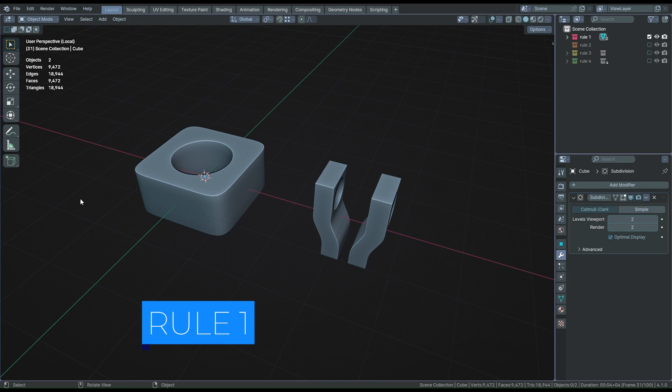The first rule of this workflow is not to let the subdivision modifier determine the shape or curvature of your mesh. This is an issue because when it comes to texturing and texture baking, especially if you are baking normal maps, the high detail mesh that you would be baking from would actually have a different shape to the low detail mesh, causing issues to the mapping and shading of textures.

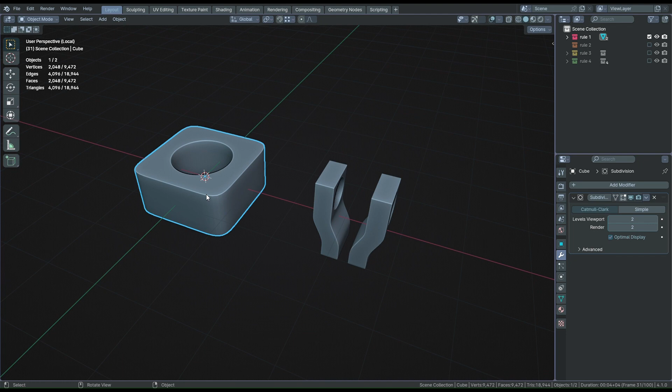The whole point of using supporting loops and creases is to control the subdivision modifier, but if we are letting the subdivision have control over our mesh, the point is lost and we are back to square one. Over here I have two shapes. Each one is wrongfully depending on the subdivision modifier to curve its sharp edges.

This first mesh is dependent on the subdivision modifier to curve its corners. As you can see, the base mesh corners are sharp, but the subdivided result is smooth. We discussed in the last video why we can't just apply a crease to these specific edges. Now let's discuss how to solve it. The answer is quite simple. If you want this edge to be smooth, smooth it manually instead of depending on the subdivision modifier.

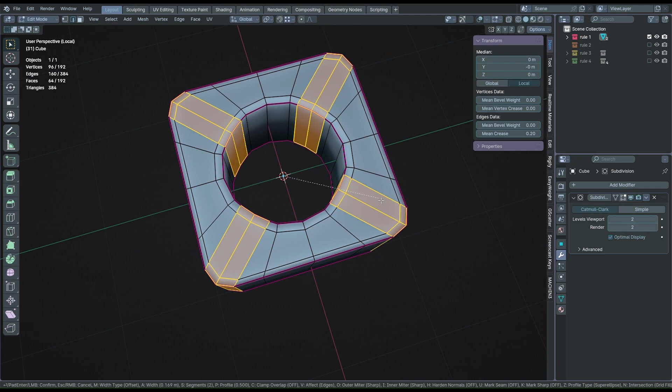So let's take each of these edge loops and bevel them using two segments and a shape of 0.5. If this model had more detail, using a stronger bevel with 4, 6, 8 or any even number of edges would be more appropriate. Now, the modifier doesn't change the shape of our original mesh, it only smoothens it.

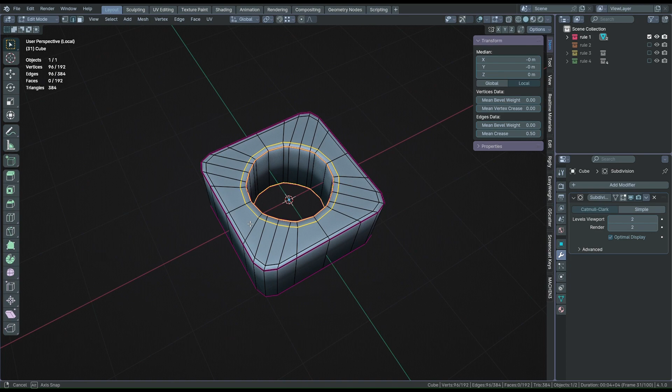However, we will have to recalculate the circular hole, as the extra edges made them uneven. Select every circular loop and run the circle tool on all of them at once. This model is fixed, let's move on to the second one. In the next section, we will learn about localizing topology, which is a method that will be very useful when working on these kinds of problems in the context of a more complex mesh.

This model has a similar issue. These original edges are sharp, but the subdivision modifier curves them. In this case, if we wanted to keep the edges sharp, it would be as simple as creasing them, but let's assume we want them to be curved. In the same way as the previous model, all we need to do is bevel the edges manually, providing a lower poly curved mesh that our subdivision smooths over, instead of completely changing its shape.

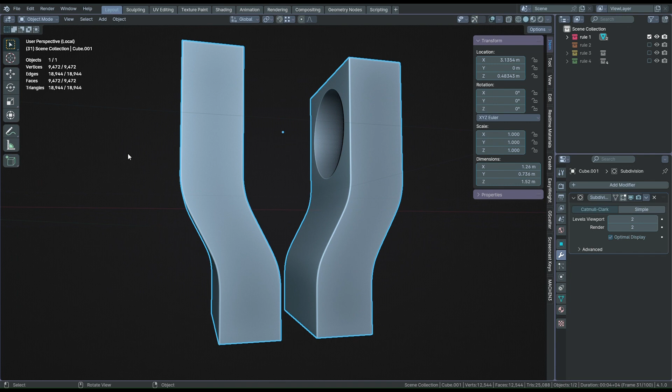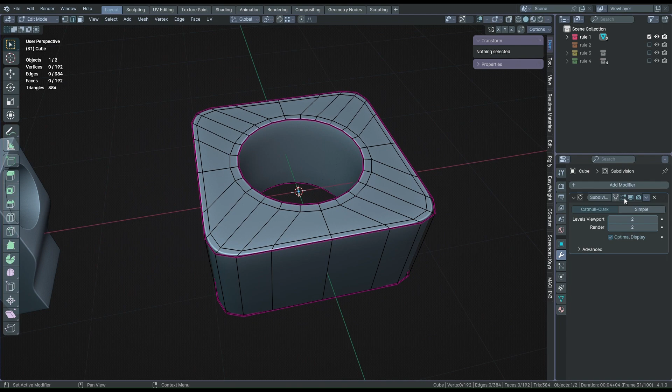Notice how for both examples, after adding beveled edges, the difference between the subdivided and unsubdivided models is less pronounced, meaning we have done a good job at controlling the subdivision's effect on our mesh. A good habit is to disable the edit mode view on the subdivision modifier. This forces you to make good base meshes regardless of the subdivided result, and helps you avoid depending on the modifier to determine the shape and curvature of our base mesh.

So to summarize, the core of Rule 1 is to be in control of the subdivision by manually adding curvature, and using the subdivision to smooth it, but not define its shape. The second rule is to make sure your creased edges have good edge flow, meaning they are neighbored by two identical edges, and that their flow is not disrupted by poles. Without this, your objects won't smooth well.

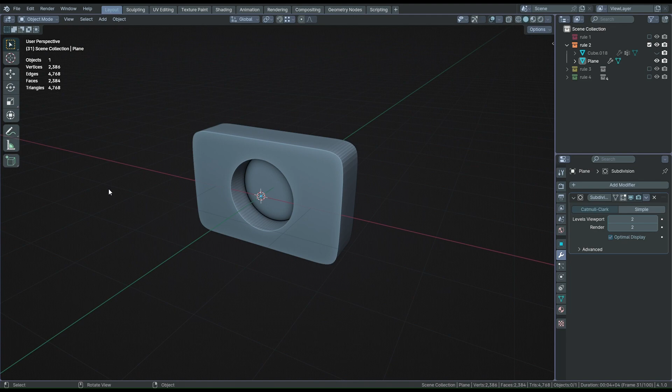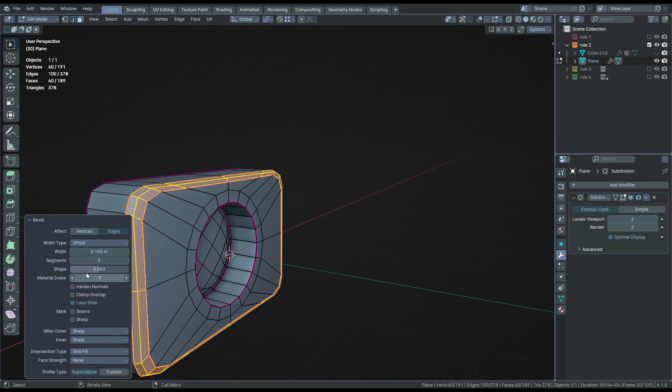Take a look at this object. The circular hole is great, our creased edges have good neighbors, and all the poles that would have disrupted this loop have been pushed inwards using another loop cut. However, looking at the outer loops, this one does not have good neighbors, nor does this one, which I can't select using Alt-click, a red flag, signaling that we have poles at each corner. This is a simple fix. This edge needs a bevel, removing the unnecessary loop and reassigning creases, and now it has good neighbors.

For the back loop, you could bevel it the same way and remove the unnecessary loop, or you could inset these faces, creating the good neighbor without also creating an unnecessary loop, making our workflow slightly faster. The poles have also been moved from the corner vertices into the neighboring loop, in the same way as it did with this circular area.

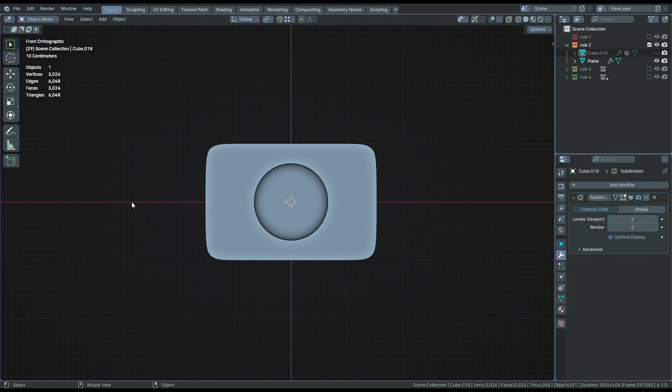In this example, having good edge flow may seem simple, but do not be fooled, this gets much harder to deal with as the shapes get more intricate. Take a look at this shape. Notice how I'm utilizing the first rule, creating curvature manually and letting the subdivision smooth it, and how I'm utilizing the second rule, giving each creased edge good neighbors.

We know that only the original creased edges need good neighbors, but in the next section we will look a bit further into scenarios in which it is important to direct the edge flow of other areas in a model. In studio settings, having good edge flow is essential, not only to ensure good shading, but when multiple people are working on a mesh, having the creased loops be easily selectable is a must.

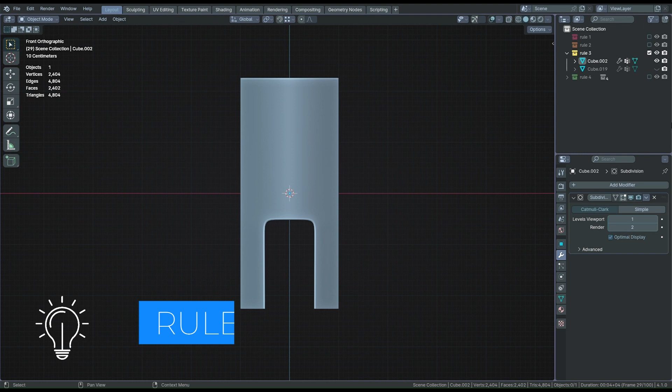Lastly, this applies to all the topics discussed in this section, but for this rule specifically, the only way to get fluent at it is through practice. There is only so much you can learn by listening to me explain it. The third rule is not to be afraid to apply a level or two of subdivision if you don't have enough general geometry in your mesh, saving backups in the process.

I know from personal experience, and from others, that it is easy to get frustrated whilst working on subdivision meshes, as you might be lacking geometry to add necessary details, but don't want to add more geometry because it disrupts the shape and smoothness of your mesh when subdivided. In these scenarios, it is always a good idea to have a deactivated collection where you can store a duplicated backup of your mesh before applying modifiers.

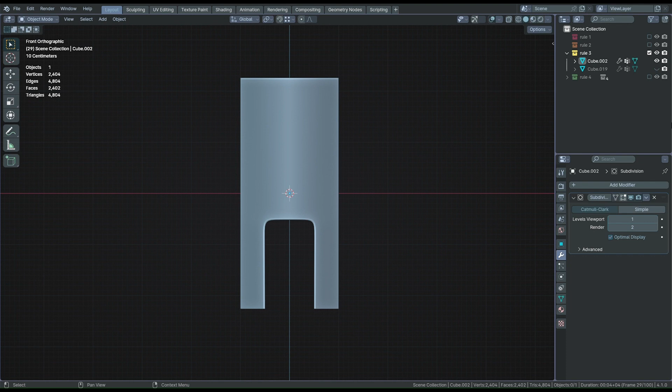For example, I have this object, which has a decent amount of faces, but I want to cut a really intricate shape into it, which this object does not have enough geometry to support. Looking at it in wireframe view, with the optimal display option disabled, I can see a preview of how dense this object will be when subdivided.

If I am happy with the level of detail I am previewing, what I can do is duplicate this object, press M and move it to a new collection, which I can call backups. Then I can disable this collection and put it in the appropriate collection, in this case within the Rule 3 collection. After this, I am able to take this mesh, apply the subdivision, and create the intricately shaped cut through it. If I ever want to revert back to the unsubdivided mesh, I have that option in the backup collection.

The implication of the third rule is not to be afraid of adopting a destructive subdivision workflow at times when you are lacking the required geometry for your mesh, and that applying a subdivision layer is almost always more efficient and effective than flooding your mesh with more loop cuts in an attempt to make it more dense. If you are unsure on a larger scale about a change you are about to make to an entire project, don't hesitate to save a backup.

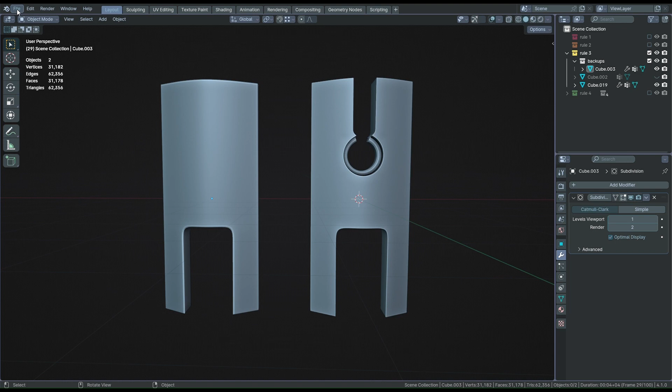The fourth rule is to always keep in mind the limits of the Crease Plus subdivision workflow. While it is the best way to achieve clean, smooth models, it can be laborious and time-consuming. To confront this, subdivision modelers are required to be able to optimize their workflow, think ahead, and be smart about how they spend their time. The best ways to optimize your workflow are to use non-destructive tools and modifiers, like mirrors, arrays, and instances. Let's go through how each of these can be used.

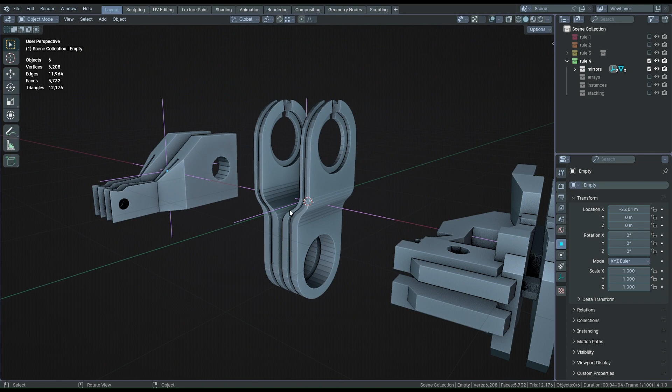1. Mirrors, a quick way to generate a lot of detail. You can create, for instance, a small robotic part, and set an empty plane as the mirrored axis, generating double as much detail in half the time. This gets exponentially more intricate once you introduce three-dimensional depth into your objects, and even more so when you add holes on the mirrored axis, giving the illusion of extreme detail.

2. Arrays, another great way to build more complex objects out of one base mesh, generating linear, radial, or even curve-based detail on grids, cylindrical patterns, and curves. To really sell the idea that arrayed meshes are actually larger intricate objects, it is important to implement patterns that flow between instances when arrayed. The more intricate the patterns, the harder it is to spot that this is an array of instanced objects, rather than one detailed object.

Making linear arrays is straightforward, cylindrical arrays are slightly more complex. Create an empty plane and a cylinder. Make sure the array modifier is set to object and select the plane. It is essential that they have the same origin. A little bit of maths is needed to understand this, but otherwise it is simple.

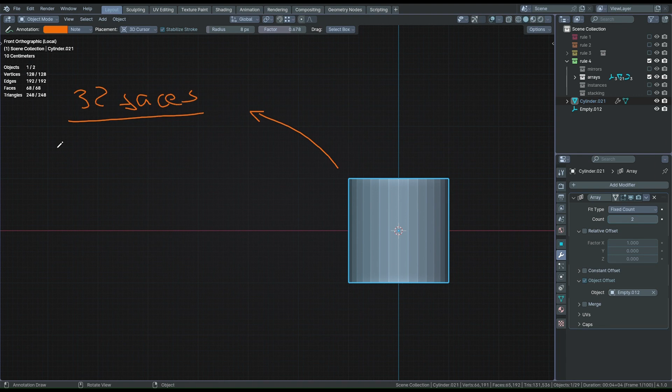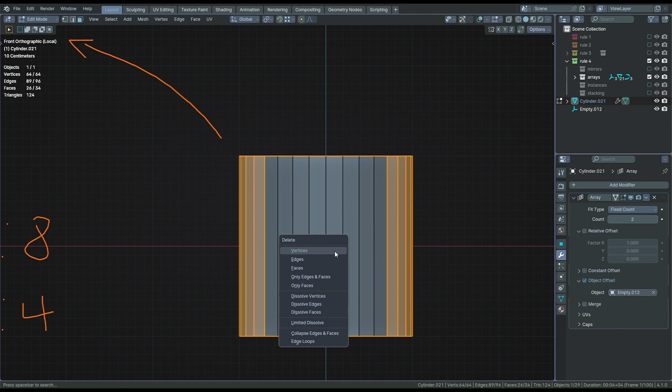I'll go with 4 and 8, and we'll make a pattern with 8 faces, so P equals 8, then array it 4 times, so A equals 4. I'll select 8 faces and delete the rest, and change the array count to 4. Nothing has happened, because we need to rotate the empty to see the array.

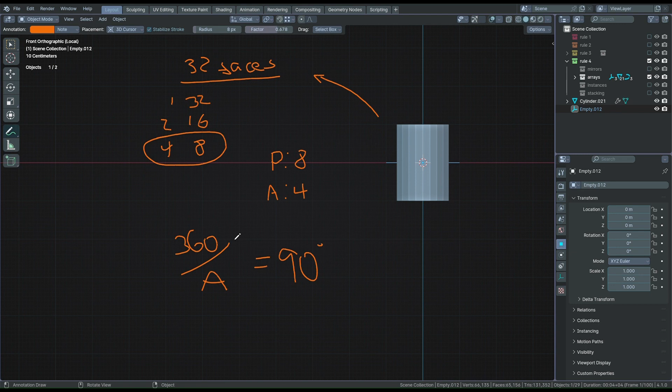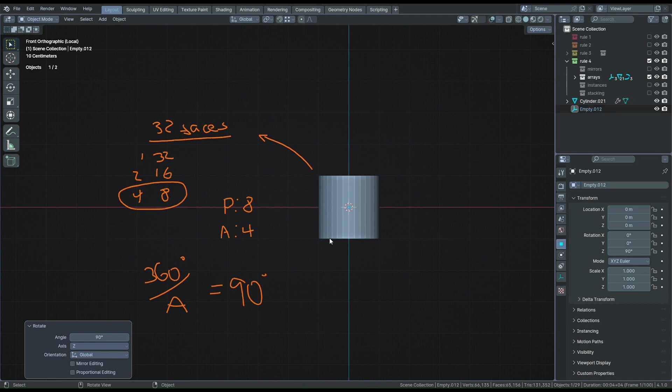To know how much to rotate the array, take the value of A, 4 in this case, and divide 360 degrees by it. In this case that is 90 degrees, and as you can see, if I rotate the empty by 90 on the Z-axis, our cylindrical array is perfect. Finally, enable the merge option, and the first and last copies option, so that our arrayed objects merge together.

I can now edit 1/4 of the mesh, and the pattern is repeated on the other 3/4. Practice this if you still aren't confident in using the formula. We will be learning about curves and arraying along curves in a future section. 3. Instances. Using instances has many benefits.

It allows you to model repeating patterns very fast, can help you model parts that are placed with awkward rotations, and using them is less intensive on your machine than using duplicates. You can even stack these optimization techniques. For example, an object can be mirrored and then arrayed, or arrayed twice, or even mirrored and arrayed multiple times.

And paired with even more modifiers like the solidify or simple deform, which you could also stack, the potential effects are insane. This not only hugely speeds up your workflow, but also introduces patterns and repeating shapes in your hard surface designs. The fifth and final rule is to plan your topology well.

As mentioned near the end of the last section, as we progress through the series, and our knowledge of techniques and tools grows, the need for preparation when working on models will become more apparent. Having a digital or traditional paper where you can sketch out ideas in real time is hugely beneficial, especially with hard surface modeling, where you are imagining complex mechanical systems.

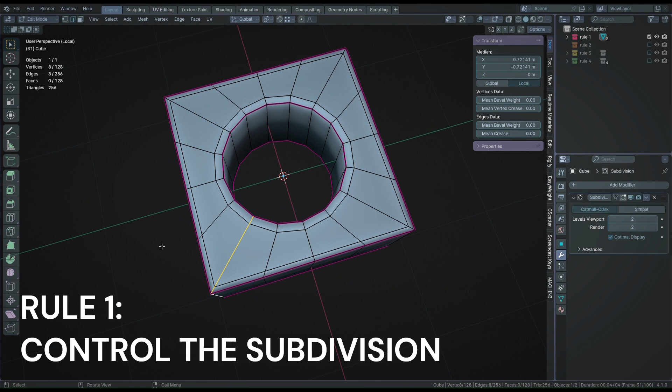Of course, it is important to have reference boards or even 2D model sketches, but a paper you can use to improvise ideas in real time can inspire creativity and help clear frustrations. Let's end this section with an overview of the 5 rules. 1. You must control the curvature and shape of your mesh manually, allowing the subdivision modifier to only smooth, not dictate shape. 2. Good edge flow is essential in hard surface models.

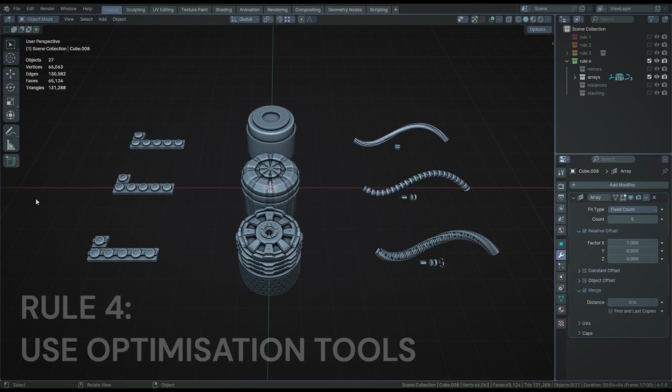Learn to recognize scenarios in which edge loops need good neighbors and poles need to be moved to safe areas. 3. Adopting a semi-destructive workflow by applying levels of subdivision is in many cases the most efficient and precise way to model hard surface detail. 4. Using optimization tools and techniques is a staple of this workflow. Without them, the workflow becomes unimaginably laborious and can become computer-intensive.

5. Spending time collecting or making references, whether you have made a reference board or are sketching in real time, whether it is done digitally or traditionally, will inevitably speed up your workflow, allow you to create more intricate designs, and helps avoid the frustrations. Over time this will become second nature, but for now, it is important that you build up these good habits and practice with these tools, as this will make the journey going forwards much smoother.

In the next section, we will be looking at an advanced modeling technique, localizing topology, which is a method used to add geometry to specific parts of models, without needing to add loops that wrap around entire meshes.